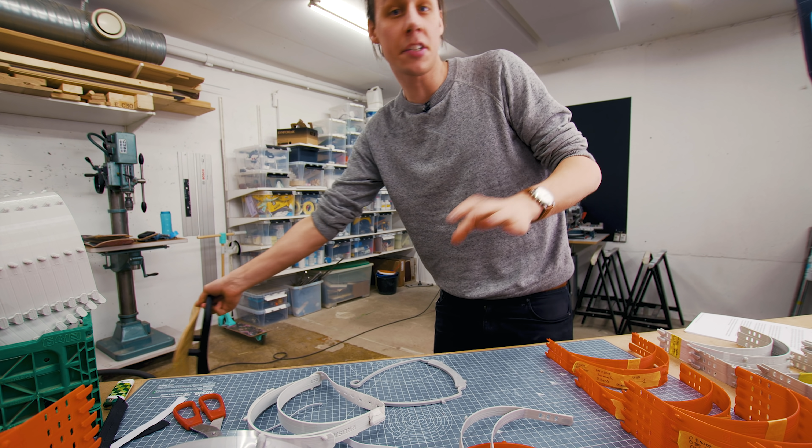So I'm sure you've seen by now, 3D printing these frames for face shields has become a big thing in the maker community. And it's really cool to see so many people across the world coming together using their tools and knowledge to help out the healthcare workers, which seem to be suffering from a global shortage of personal protective equipment.

So there's actually quite a few different designs for these face shield frames, but they all more or less do the same thing. You have this one here from Prusa that uses buttonhole elastic to hold onto your head. This one here from 3D-verkstan that uses this springy type geometry to clamp on your face, and they both use some sort of pins to hold a clear plastic sheet as the face shield part. And then there's this design, which I want to show you in this video.

This design has been developed by the local community here in Norway, and it's been an evolving design developed with the feedback from healthcare workers and with the aim to be able to print as efficiently as possible. And I consider myself very lucky to have been able to be a part of this project. Now, it works in much the same way as the one from Prusa. It uses elastic to hold onto your face, but it has a slightly different geometry for the frame itself. The pins that hold the plastic in place are also slightly different, and it can be used with a bigger variety of elastic bands, but we'll talk about these in just a second.

Before we go any further, I just want to say how proud I am to be able to be a part of this maker community, and especially here in Norway, where the community has been able to print, assemble, and distribute over 30,000 face shields like this.

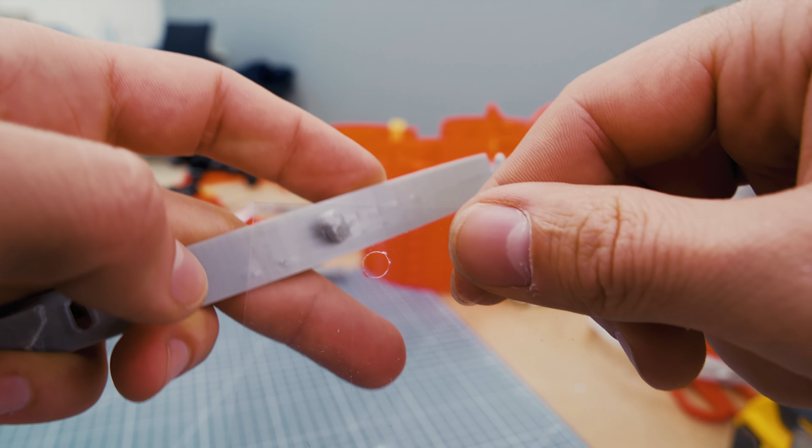So let's have a look at this face shield frame that we've designed. Oh, and by the way, I'm not saying that this one is a better design than any of the other ones that I've shown. They all work great. This is just the design that we've come up with and that suits our needs. So this frame, just like the other two that I've shown you, has 4 pegs in the front to hold a clear plastic sheet that will act as the face shield. The geometry on these is designed to hold the plastic film securely in place, as well as being able to print without needing any supports.

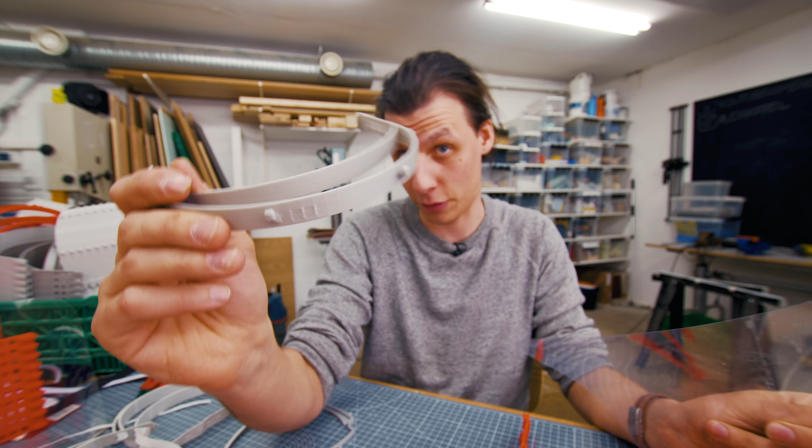Now the placement for these pegs is very important, because we'll need to make 4 holes in this clear plastic sheet that matches with the holes on this frame. Now making these holes is actually super easy. The only thing you need is a standard hole punch, because the holes that we're going to put in this are a standardized hole punch size. The standard is called 888, and it stands for 4 holes spaced 80 millimeters apart.

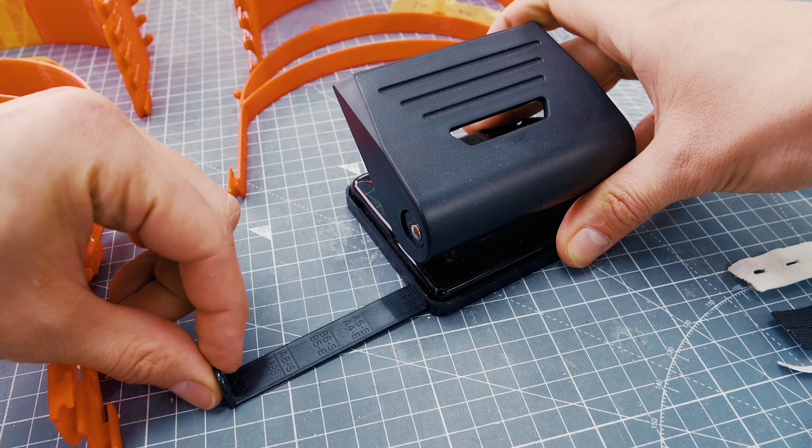So if you have one of these hole punches, you can use that one to make the holes. There's usually this little tab here that will say 888 on it that you can use to align the paper like this, make a hole, flip it around, and then make 2 holes on the other side. Now I realize that in many parts of the world, this European style hole punch is not a standard, but you should be able to use any normal hole punch and then just measure up 4 holes with the right spacing.

Moving on to the side of these frames, there's a variety of different options of elastic to be used on this side.

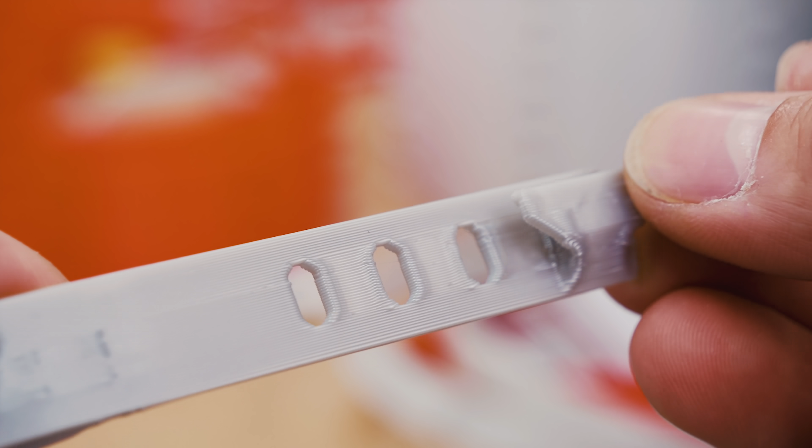You can either use the standard buttonhole elastic that will go onto this little ear here, just like the one from Prusa, but this version also has these 3 holes in the side. And these 3 holes allow you to use a bigger range of these normal flat elastic bands.

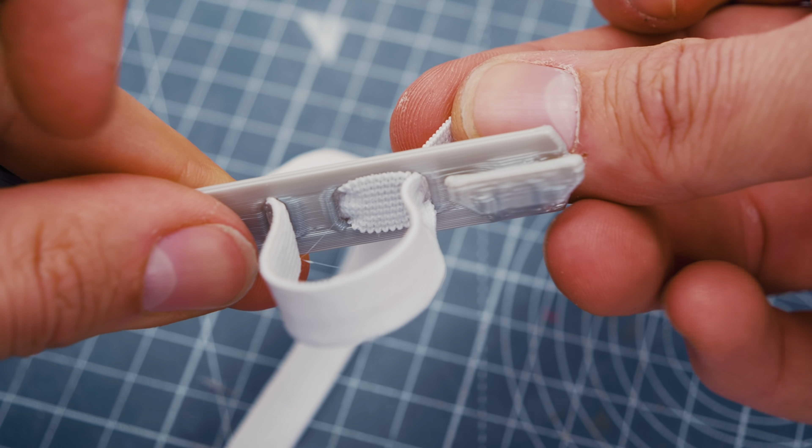This 10mm elastic band seems to be the ideal, and the way you thread it in is that you go in from the inside of the first hole, go out through the frame, come back into the second hole, and then back out through the third. And then just to make sure that everything is locked in place, I would go back through the hole that you came from originally. And that way everything is nice and securely in place.

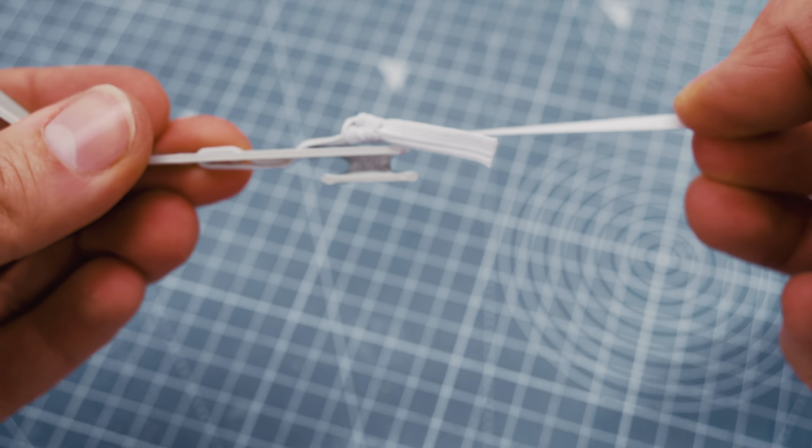Now this also works with thinner elastics, threaded the same exact way. I would just recommend putting a little knot at the end to keep it in place. And it also works with bigger elastics, just like this. I only threaded it through the middle hole from the inside and then back through the back hole, and that kept it in place just fine.

Oh, and I would also recommend putting a little soft padding on the inside here, because people are usually going to be wearing these for like 10-14 hours a day, and it can get a little bit uncomfortable with this plastic rubbing against your face.

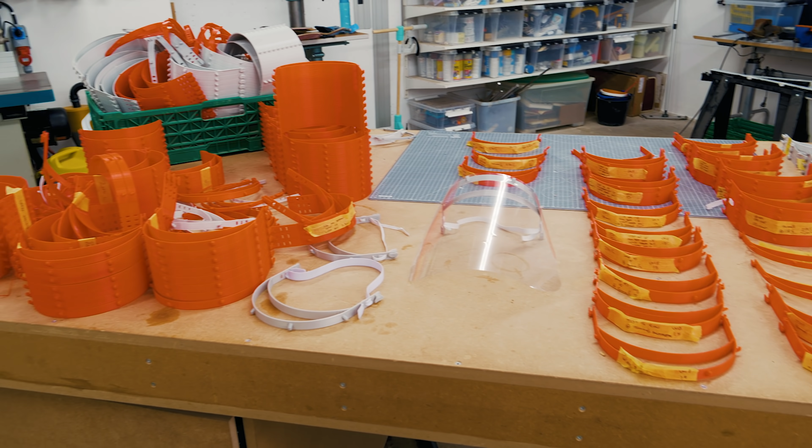All right, so let's have a look at how to print as many of these as quickly as possible and as easily as possible. So I printed hundreds of these frames, and I spent the last couple of weeks testing out all sorts of different settings and speeds and trying to figure out what sort of differences things like different printers, nozzle sizes, layer height, or movement speed actually have. So we'll start with the general things. Easy changes that apply to all 3D printers, stuff that will increase your efficiency without having to fine-tune a ton of settings. And then for those of you who want to optimize your printers even more, we'll go into a bit more detail as we go along.

Quick reminder though, everything you're about to see is using PLA as the plastic I'm printing with. PLA is a great plastic, it's quite chemically resistant, but it doesn't like high temperatures that much. If you need that, you can definitely print these in ABS or PETG. A lot of the tips and tricks that I'm about to tell you will still apply. The temperatures and speeds probably will be off though. Okay, let's clean this up. I'll get my computer and then we'll have a look at how to print these as fast as possible.

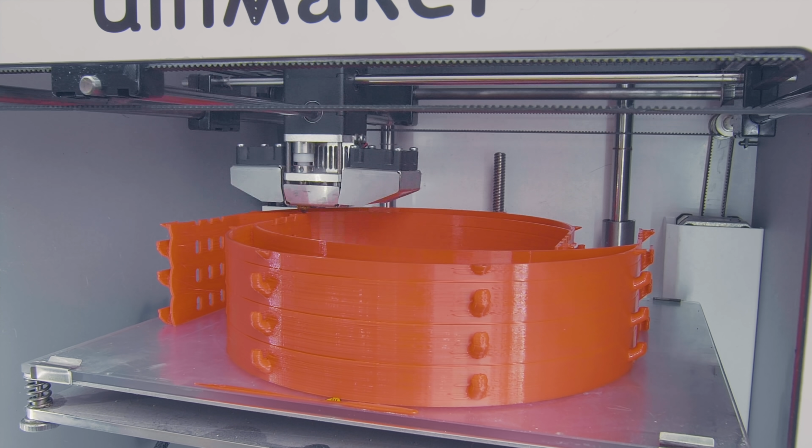Okay, on to some tips and tricks. Tip number 1, print in stack. Okay, so first things first. This design specifically is optimized to be able to print in a stack. That means that we'll print a whole stack of these at once and then we'll separate them once they're finished printing. And as I mentioned earlier, the geometry of the design is optimized so you can print these without any supports. That cuts down on printing time and it also cuts down on cleanup after the fact. You'll literally just rip them apart and here you go, another frame.

And generally speaking, if you do nothing else than switching from printing 1, maybe 2 at a time to printing a stack of these, you're gonna save a ton of time because you don't have to restart these every few hours and you can let this thing run overnight. So in order to be able to print these in a stack, we need to switch to the right layer height. And switching layer height, even if you just print 1 at a time, will also help you speed up the print time. So we'll jump into Cura right now, which is the slicer that I'll be using for all these examples. If you're using a different slicer, most of this will still apply. The buttons just might have different names.

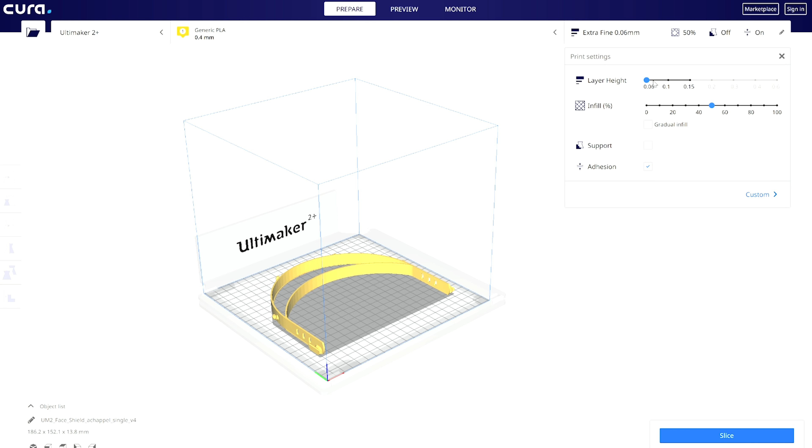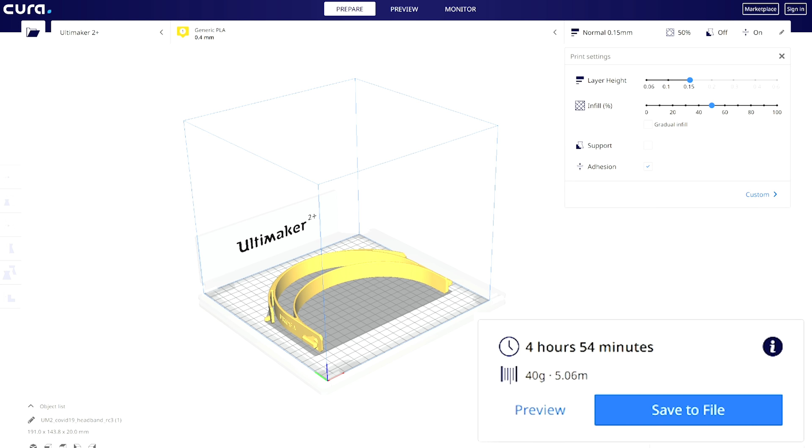Okay, so let's start with importing a model of just 1 frame, just so we have a baseline to compare our improvements to. We'll use the standard settings, set this thing to as coarse as it will go, and maybe 50% infill, and that will give us 2 hours and 36 minutes to print this thing. Wow, that's a really long time to print one of these. But just for fun, let's try and import the other 2 designs and see how long those would take to print in the same settings. So the one from Prusa would take 4 hours and 54 minutes, and the one from 3D Verkstan would take 1 hour and 49 minutes.

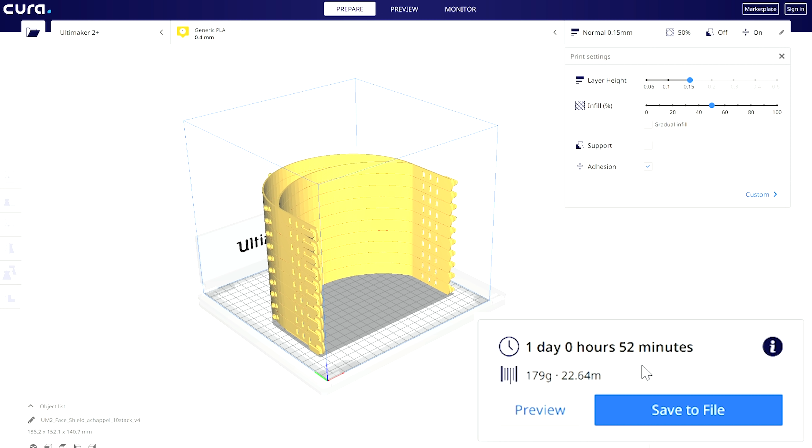So quite a big range, but in my opinion, they all take a really long time to print. And keep in mind, a lot of the things that we'll talk about now will also apply to the other 2 designs. Okay, so now let's import a 10 stack of these and see how long that's gonna take to print. And wow, would you look at that? It says that it's gonna take a full day to print 10 of these in a stack, which, like we just talked about, would still be faster than printing 10 individual ones, 1 at a time.

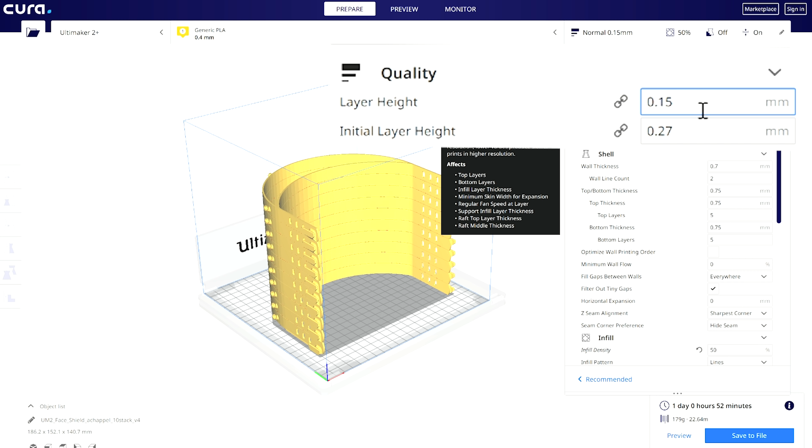But like we mentioned, there's one setting that we have to change in order to print these in a stack, and that is layer height. So this model is designed to print with 0.3 millimeters layer height. And regardless what printer you're using or what nozzle you're using, you'll always have to use 0.3 millimeters layer height. Because that is the height of the gap in between these frames that allows us to rip them apart after they're printed. And look at that, changing nothing else, the print time is down to 12 hours and 44 minutes. So already half the time.

Next tip, nozzle size and line width. So here's the thing that might be a bit specific to your printer. We've changed the height of the line. Next up is the width. We can change that regardless of the size of the nozzle, but there's a limit to how much plastic you can squeeze out through that nozzle. So naturally, a bigger nozzle is gonna be better because you can squeeze more plastic out of a bigger nozzle. So if you have the ability to switch to a 0.6 or a 0.8 millimeter nozzle on your printer, that's gonna help you out a lot. If not, there's still a lot to be gained from having a look at the line width.

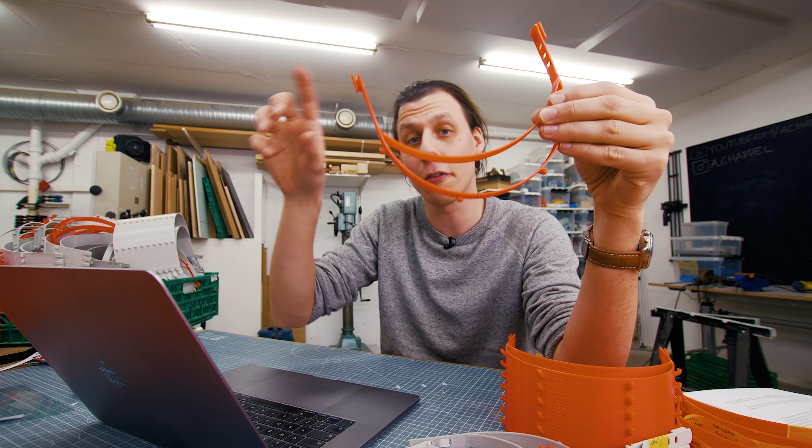So this design is made specifically for a 0.8 millimeter line width, because all of the geometry on this frame is exactly 1.6 millimeters wide, which is the equivalent of 2 lines of 0.8 millimeters. Or if you're using a 0.4 millimeter nozzle, 4 passes with 0.4 millimeters. So naturally, 2 passes with a 0.8 millimeter nozzle is going to be quicker than 4 passes with a 0.4 millimeter nozzle.

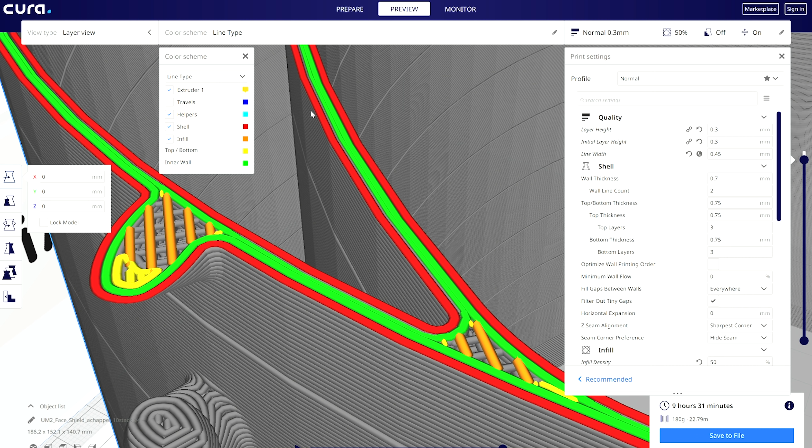With nothing changed, the printer would do 4 lines and then try to fill the gap between those lines, which is super inefficient, and that is because the default line width for the 0.4 millimeter nozzle is actually 0.35 in Cura. So we'll set that to 0.45. The reason why we set it a bit over 0.4 millimeters is that the lines have a bit of an overlap for a stronger print. And if you can't see the options that I'm talking about, you can click on this little gear icon and select the option that you want from the menu here. Now with just changing the line width, the print time went from 12 hours and 44 minutes down to 9 hours and 31 minutes. So we're really making rapid progress here.

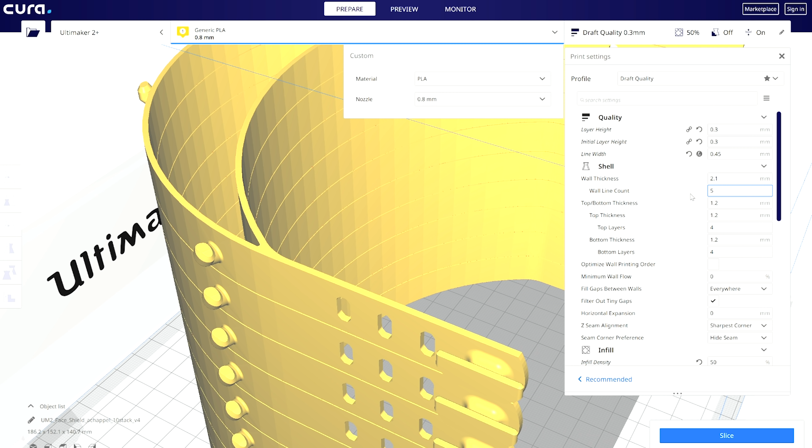Now, you can imagine where I'm going with this. If you change to a 0.8mm nozzle and then set the line width to 0.85, we're down to 8 hours and 22 minutes. But keep in mind, these numbers are still just an indication of how fast we can actually print, because the speed at which you can move the nozzle varies a bit between nozzle sizes and between printers. But we'll get back to that in just a second.

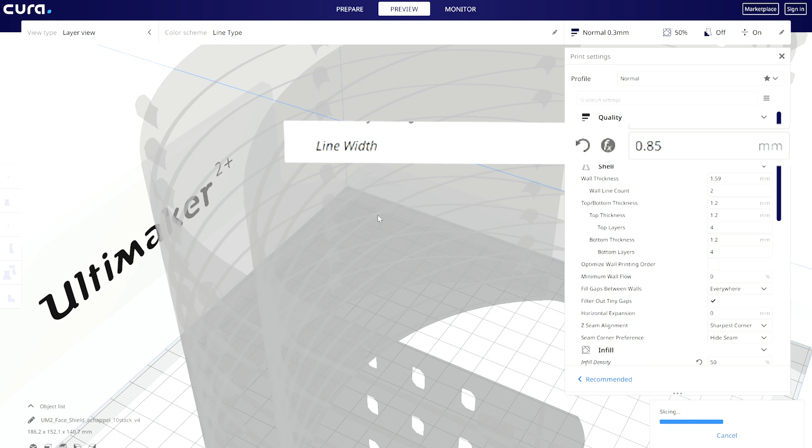Lastly, here's a cool trick for you. If you only have a 0.6mm nozzle, you can also set the line width to 0.85 and just squish out more plastic. You have to watch the print speed a bit because you're trying to squish more plastic through a thinner nozzle, but on many printers, a 0.6mm nozzle can be just as good as a 0.8.

But on the 0.6mm nozzle, setting that to a 0.85mm line width, I can still print at 80mm a second, which is literally twice the amount of plastic that you're pushing out at the same time. So as you can see, different printers might vary a bit, but with all these examples, you should have a good starting point for your printer. So let's try this out.

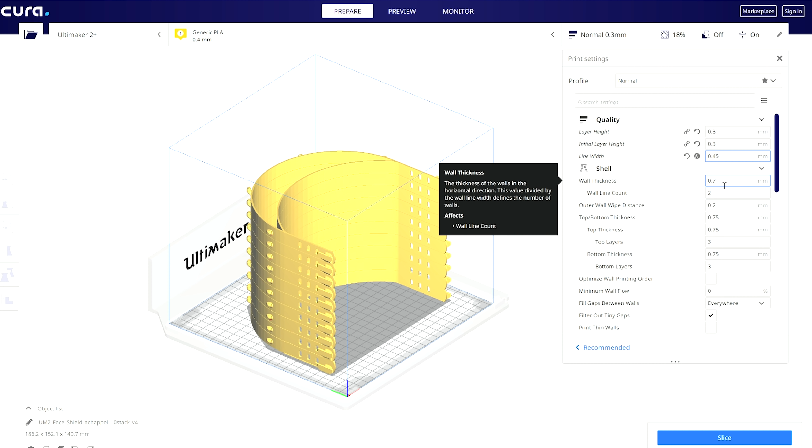So from testing, I know that with the 0.4mm nozzle, I can print 80mm a second on my Ultimaker. So let's set everything here to 80mm a second, with the exception of the initial layer. We'll keep that at 25. And we'll keep that at 25 across both printers and across all nozzle sizes, just to get a really solid first layer. Now we get the print time down from 9 hours and 31 minutes down to 5 hours 52 minutes.

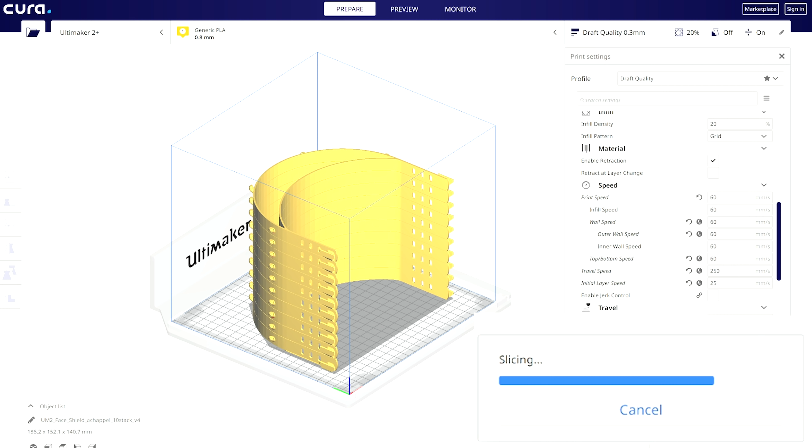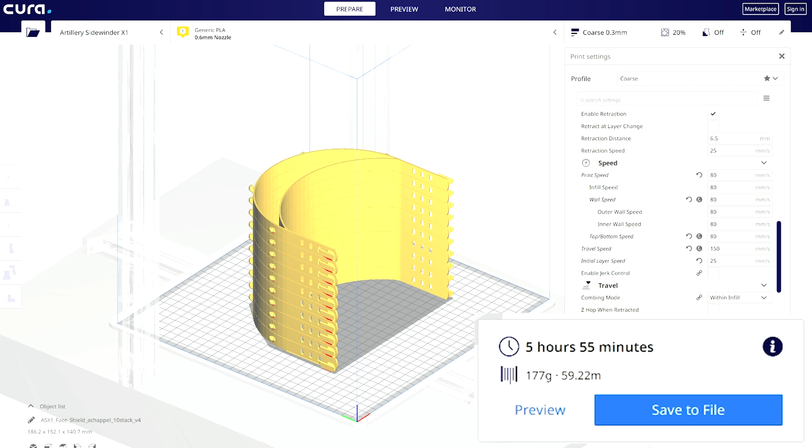And on the 0.8 nozzle, I know I can do 60mm a second, and that will give us a print time of just 4 hours and 12 minutes. Oh, and on the Sidewinder, with a slightly different hot end, I can do 80mm a second with the 0.4 nozzle, which is 8 hours and 29 minutes, but I can do the same speed with the 0.6 and the 0.8mm nozzle, which both give me a print time down from 8 hours and 29 minutes to 5 hours and 55 minutes. And keep in mind, there will be different times between the two printers.

There's still some settings that we haven't looked at yet, as well as there will be things like acceleration, which will be different between the two printers. Also, you can usually set the travel speed a bit higher than default. On my Ultimaker, which just has a lightweight moving head, I set that to 250mm a second. On my Sidewinder, which has a moving bed, I set that to 150.

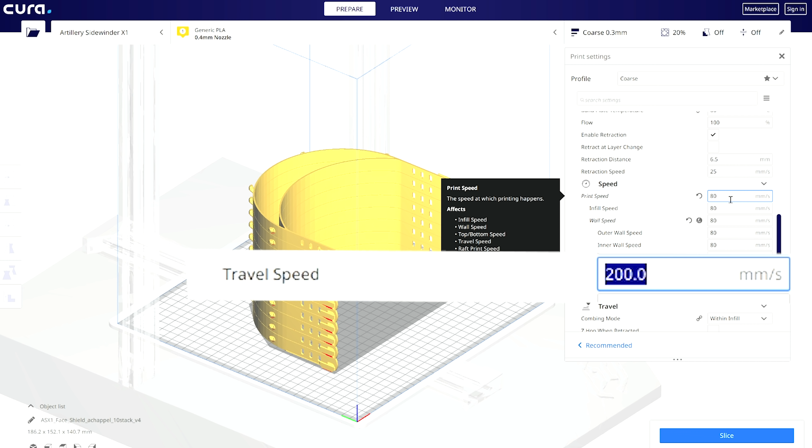Next tip, temperature. The right speed is key to get a fast print, but to get that speed, you have to have the right temperature. I found that 230 degrees Celsius is a good starting point. It's fairly high, but we're also trying to move a lot of plastic. Your printing temperatures might vary a little bit based on the plastic that you're using and how fast you're moving, but 230 is a good starting point. For my 0.8mm nozzle on my Ultimaker, I use 220 degrees C, and for all the other nozzles on all the other printers, I use 230 degrees C.

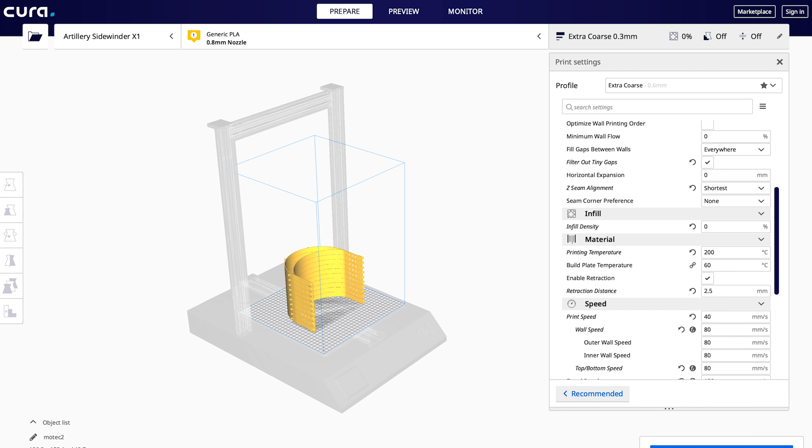So on any other printer than on the Ultimaker, in Cura, you should be able to go in here and change the temperature to whatever you want. On the Ultimakers, you can either change the temperature once you've started the print from the menu on the printer, or you can enable that setting in Cura. To do so, you can either go into settings and change the G-code flavor to Marlin. This, however, will change the startup sequence of the printer. So you might need to just copy and paste this from the link in the description below into this little box right here.

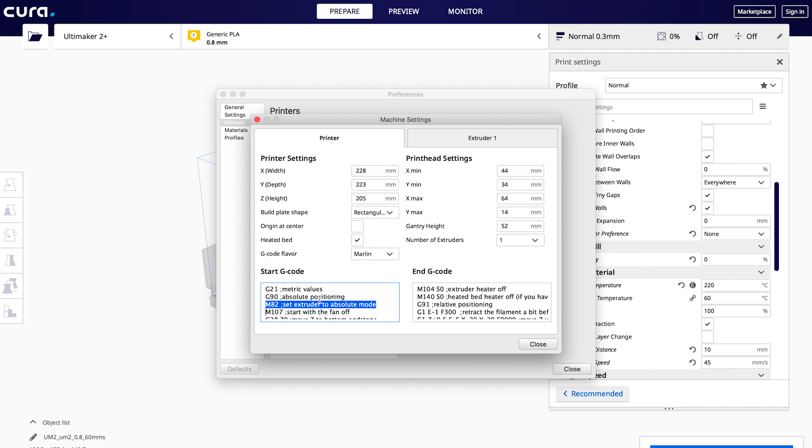Or another way you can do this is that you can just import one of these files that I've linked down below and then open them as a project. And it will have that setting enabled together with everything else that you need. For this to work though, you have to have the right version of Cura. I'll make sure to leave a link down below to which version of Cura I used for which projects.

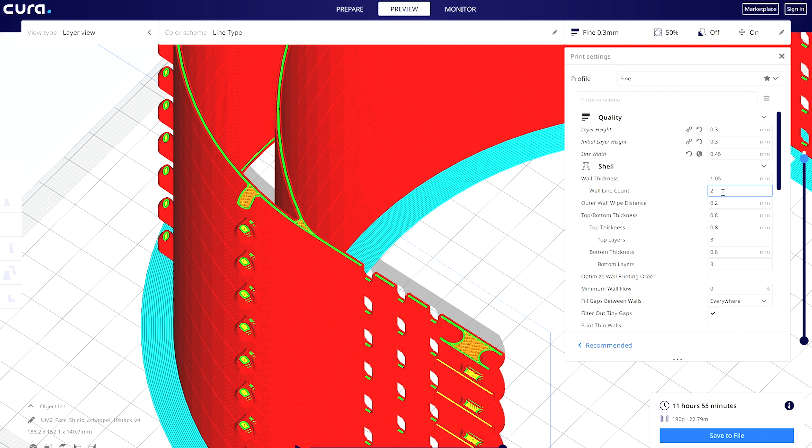Next tip, shell and infill. This is where we set the amount of lines the printer is going to do around a part before it's going to start on the infill. And on this part, you don't need any infill, so set that to 0. As for the shell, remember we talked about the printer needing to do a certain amount of lines to cover the thickness of this part, so the shell line number is going to be the exact same number. So for the 0.4mm nozzle, we'll do 4 lines, and for the other two, we'll do 2 lines. That way, everything in the model will have the same thickness and everything will have the same strength. These little ears on the sides will be hollow, but that's totally okay.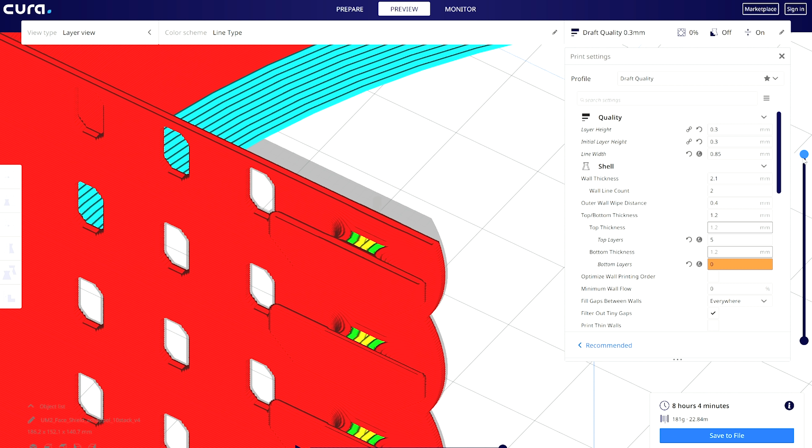Also, I set the bottom layers to 0 and the top layers to 5. The only thing this will impact is the top of the ears, which will be nice and solid, and otherwise there's none of what you would consider bottom layers in the model. Compensate wall overlaps. So this button changes the width of the line to compensate for that little bit of overlap you get from setting the line width slightly higher. Now for my Ultimaker, I had to uncheck this box so that it wouldn't compensate and make slightly thicker lines.

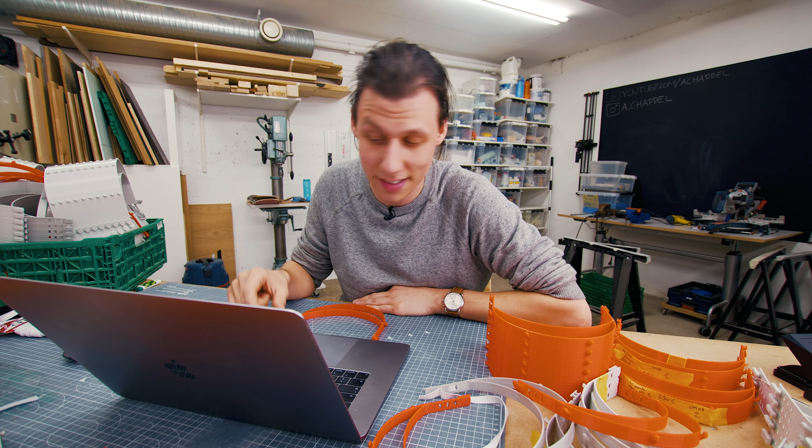On my Sidewinder, I left that option checked and didn't do anything more about it. Now sometimes what can happen if you're printing really fast is that the lines don't connect properly and separate after the fact. With the 0.4mm and the 0.8mm nozzle on my Ultimaker, I just unchecked that box and it was fine. And with the 0.8mm nozzle on the Ultimaker, I also increased the line width to 0.9mm.

Next tip, build plate adhesion. Glue stick, glue stick, glue stick. Just regular old glue stick that you used as a kid in school. This thing will save you so much time and trouble. A liberal layer of this stuff on the print surface before you start printing will make sure that the print sticks properly to the build plate, but that you can also remove it with relative ease.

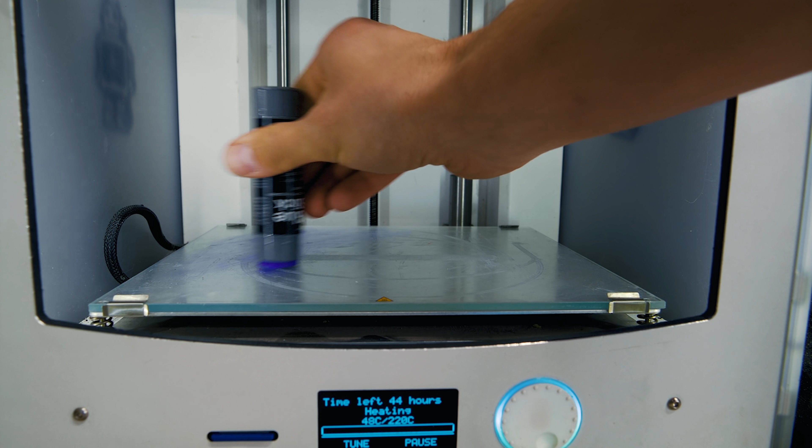You can use this stuff either with a heated or a non-heated build plate. I use this stuff on my glass build plate on the Ultimaker, even on the textured one on the Sidewinder. If you use a glue stick, you can turn off what is called build plate adhesion. So normally you have 3 settings to choose from. You can either use brim, raft, or none. And depending on what you're using now, this can save you up to half an hour of printing time. Glue stick, it's great.

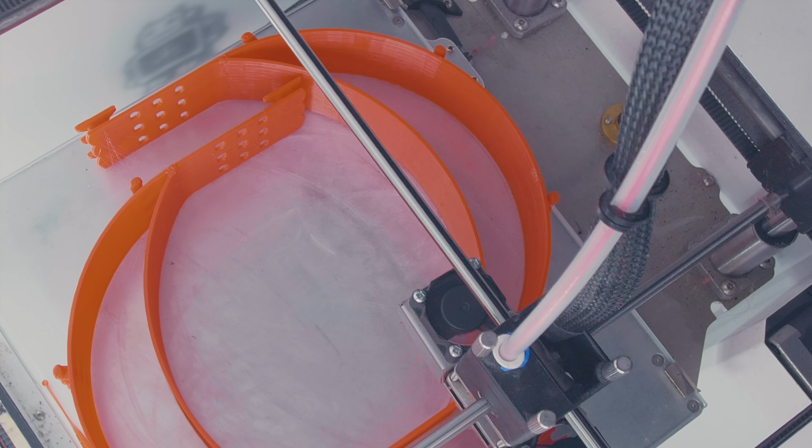A few quick settings. Let's run through a bunch of random settings that I have on both the printers and all the nozzles. And for the settings I don't mention here, just leave those at default for now. Optimize wall printing order, off. Outer before inner walls, off. Fill gaps between walls, everywhere. Print thin walls, off. Filter out tiny gaps, yes. Seam corner preference, hide seam. Combing mode, off. And no supports.

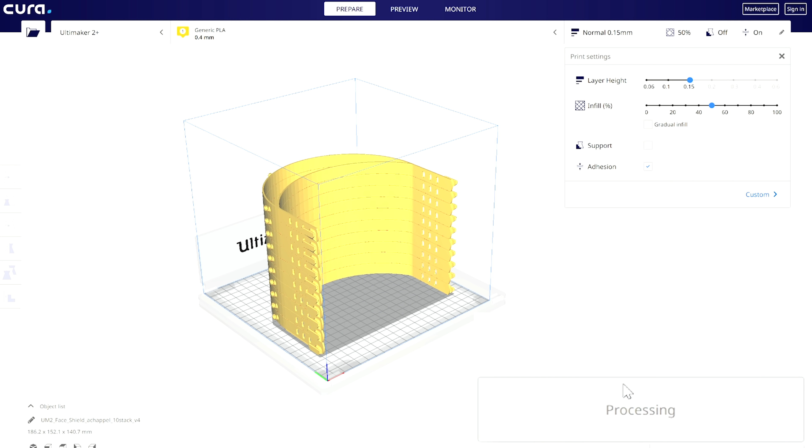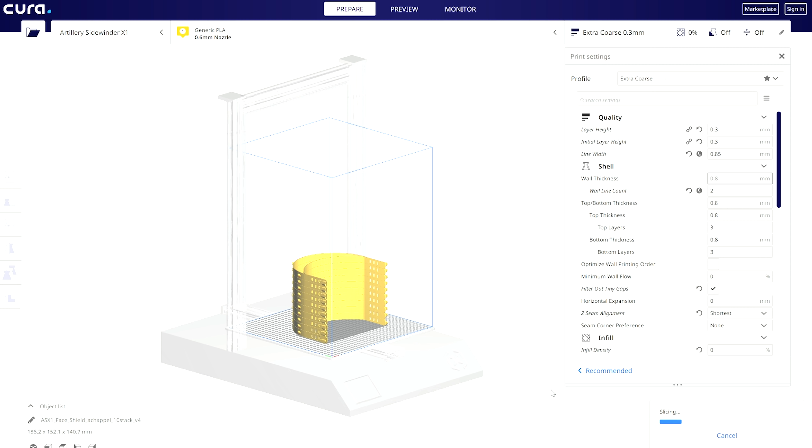So let's see where we're at. With all those settings, we go from a default 1 day and 52 minutes on the Ultimaker with the 0.4mm nozzle to 5 hours and 51 minutes with all the settings for the 0.4mm nozzle, and just 3 hours and 56 minutes with the 0.8mm nozzle. And that's just about 24 minutes for one of these frames, which is roughly 6.5 times faster than what we started out with. Pretty good, huh? And on the Sidewinder, we get a print time of 6 hours and 58 minutes with the 0.4mm nozzle and 4 hours and 1 minute with the 0.6 or 0.8mm nozzle.

Adhesion between parts. Okay, so we've so far gotten the print times down a lot. Now we just need to make sure that the prints actually come out all right. And the main thing to watch out for is that one frame will print properly on top of the next frame. You want it to get just stuck enough to be on there properly, but not too stuck to the point where you can't remove it after the fact.

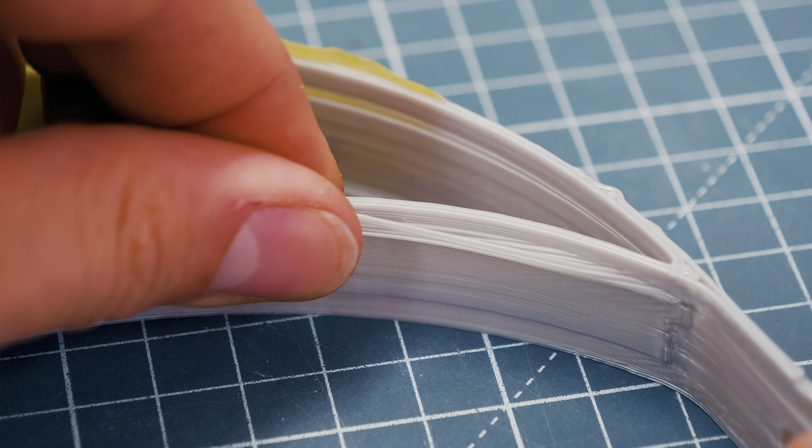Now on the bigger 0.6 and 0.8mm nozzles, this has generally not been that much of a problem. But as a rule of thumb, if the prints get too stuck together to where you have a hard time ripping them apart, try lowering the printing temperature in 5 degrees C increments. If they don't get stuck together enough, to the point where they're starting to be a little bit stringy on the inside here, try increasing the temperature in 5 degrees C increments.

With the 0.4mm nozzle, this can be a bit more challenging, purely because of the fact that there's more lines that need to connect on top of each other. On the Ultimaker with the 0.4 nozzle, this was never an issue. But on the Sidewinder, and from what I heard on a lot of other printers with 0.4 nozzles, this can be a little bit of an issue.

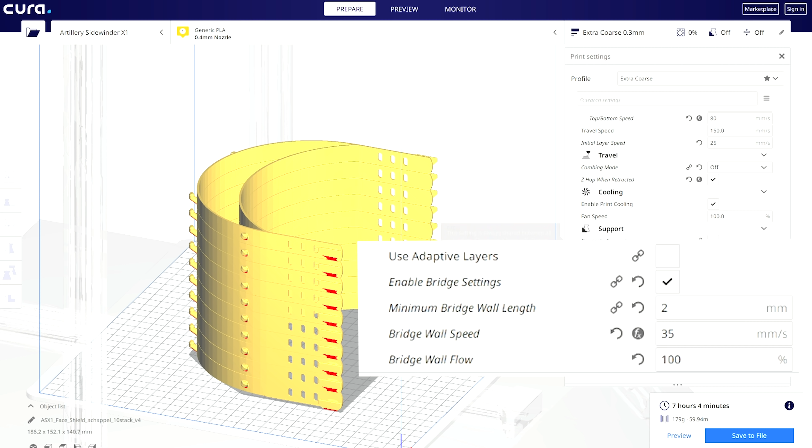And the solution for this is to slow down the print speed a bit as it's printing the first layer of the frame above. Now in Cura, you can do this by setting the bridge wall settings. I'll set the minimum bridge wall length to 2, bridge wall speed to 35, and bridge fan speed to 50%. That makes the plastic a bit more sticky and gives it more time to connect to the layer below.

Next tip, holes. Now this is where it starts to get a bit more specific to each printer. The Sidewinder didn't have any issues with the holes whatsoever. The Ultimaker, however, struggled a little bit to get a nice finish around these holes. Now I think a lot of that has to do with the Ultimaker having an external extruder that pushes the plastic through a Bowden tube, versus the Sidewinder, which has a direct drive extruder that pushes the plastic a much shorter distance and is able to retract that plastic much faster.

So I'll show you how I fixed this issue on my Ultimaker, but it might not be a problem on your printer. So on the 0.4mm nozzle on my Ultimaker with the higher speeds, the finish wasn't great. So I wanted to slow down the speed at which the nozzle prints those little features, which is a standard thing you can do in a lot of other slicers, but for some reason, Cura doesn't have that feature. So here's where it's gonna get a bit more tricky.

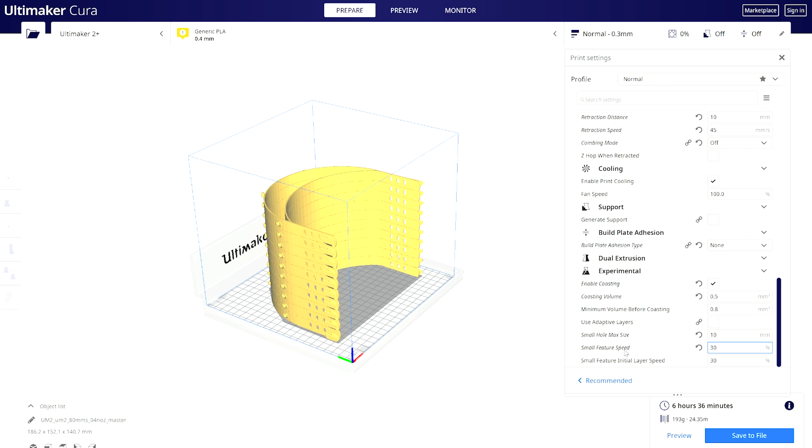I had to download a custom version of Cura, which I'll link down below, that had this enabled. And after installing that, importing the model, putting in all my settings, everything looked great. Now this setting is called small feature. I'll set small hole max size to 10, small feature speed to 30%. That will slow down the print speed of those small features to 30% of the maximum speed on any segment below 10 millimeters in length.

And that fixed it. And with the 0.8 millimeter nozzle on the Ultimaker, I had a similar problem where I was just moving so much plastic that the printer was just over extruding those little segments around the holes. And the feature that I found works best to eliminate this on the 0.8 millimeter nozzle is called coasting. Now coasting is when the printer stops extruding a little bit before the end of the line, and the remaining pressure in that Bowden tube will force the plastic to be extruded out.

Now this is a default feature in all versions of Cura. The weird part is that for some reason Cura doesn't want to apply that feature to those small segments in any of the Cura versions I had installed already. But in the version I just installed to get that small hole feature, it worked just fine. So I can highly recommend that customized version of Cura. So far it's been working great.

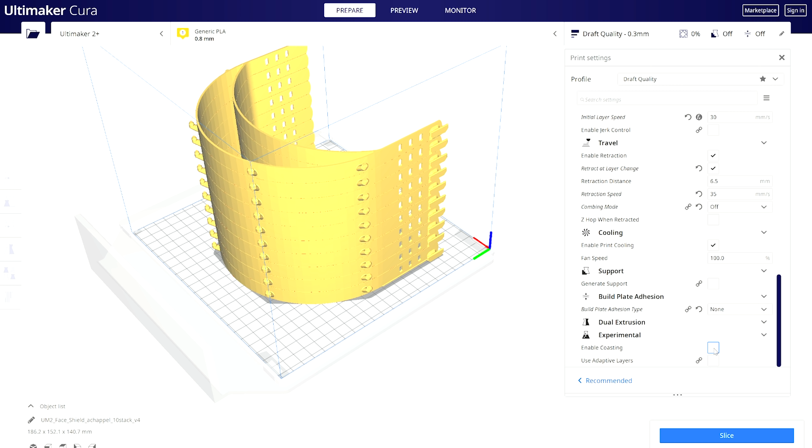So I set the coasting volume to 1.5, minimum before coasting to 1.5, the coasting speed to 50%, with the small hole feature turned off. And this worked pretty well. However, the Sidewinder with its direct drive extruder still did a little bit better of a job. And just because you can print at 60 millimeters a second with a 0.8 nozzle here, doesn't mean you have to. You will get a nicer finish on 50 millimeters a second.

Now, this was all the settings and all the tips and tricks I had for you in this video. So now let's have a look at the final print times with all these settings applied for the two different printers. On the Ultimaker with the 0.4 millimeter nozzle, we're down to 6 hours and 36 minutes. With the 0.8 millimeter nozzle, we're down to 4 hours and 7 minutes. On the Sidewinder with the 0.4 nozzle, we're down to 7 hours and 4 minutes.

And on the Sidewinder with the 0.6 or 0.8 millimeter nozzle, remember, they're both the same, we end up with 4 hours and 7 minutes. So funny enough, the exact same time on both printers, even though we were printing at different speeds with different features enabled, and that was just a coincidence. So I really hope that this video helped you out. I hope that you can now get started printing these frames and hopefully printing those with great efficiency.